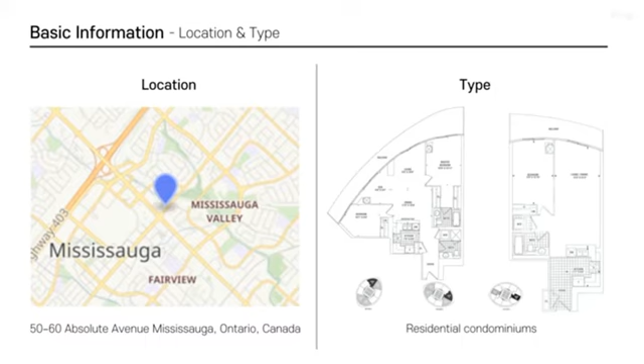Next, I will explain building organization. It consists of two buildings, Tower 1 and Tower 2. Tower 1 is 179.5 meters high and has 56 floors. The height of Tower 2 is 161.2 meters and it consists of 50 floors. And both towers have the same floor area of 2,800 square meters. In addition, each tower has 6 levels of underground parking.

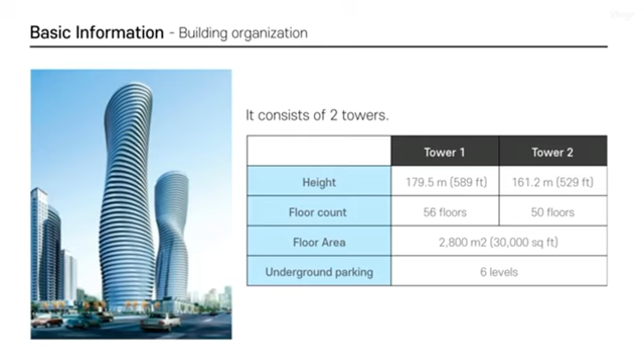Second, the purpose of the building's design. Let me explain the history of the building first. In 2004, an international design competition was held to select the architect for the third tower for Absolute World. Yansong Ma, founder of the MAD office, which is an architecture design firm in Beijing, was announced the winner. Sales were to start in May 2007 with construction beginning later that year and anticipated completion in 2009.

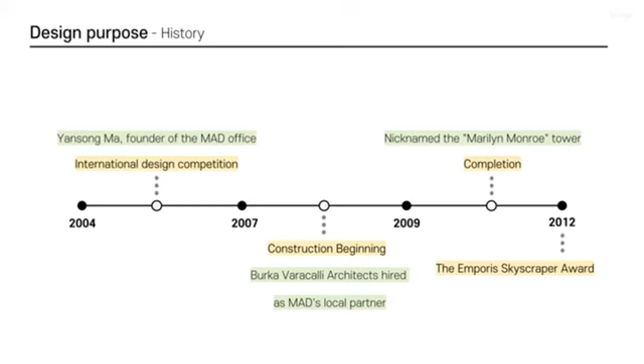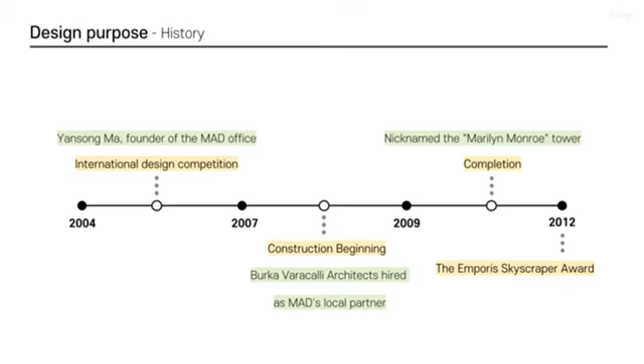Architects and engineers play an important role in building design. The main architectural design was conducted by MAD Studio, and Burka Varacalli Architects was a local partner of MAD. The meaning of local partner will be explained in the next slide. Sigmund Soudack and Associates Incorporated participated as a structural engineer.

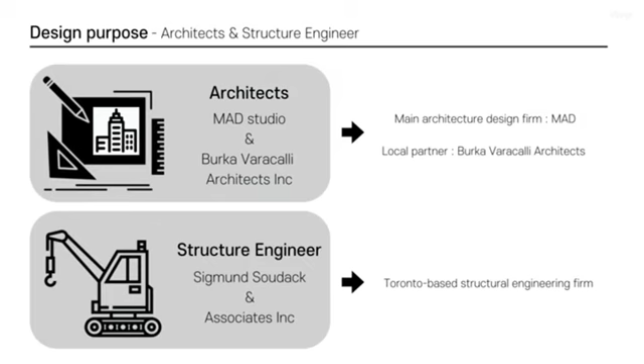Yansong Ma is a founder and a chief architect of MAD Studio. He wanted to create a new balance among society, the city, and the environment through new forms of architecture. So he designed naturalistic architectures to make harmony of environment and architecture. Absolute World Tower's naturalistic design reflects Yansong Ma's design spirit.

Burka Architects Incorporated joined the project in the capacity of Architect of Record. What does Architect of Record mean? For a short description, when an architecture firm is working on a project that is outside of their geographic location or range of expertise, firms choose an architect that is either local to the project site or skilled in that particular area of expertise. In this case, the primary architect works with the local architect to complete the project, and the local architect becomes the architect of record.

Burka proceeded with many high-rise building projects with Sigmund Soudack and Associates Incorporated. This is why Sigmund Soudack and Associates Incorporated was able to be adopted as an engineer for Absolute World design.

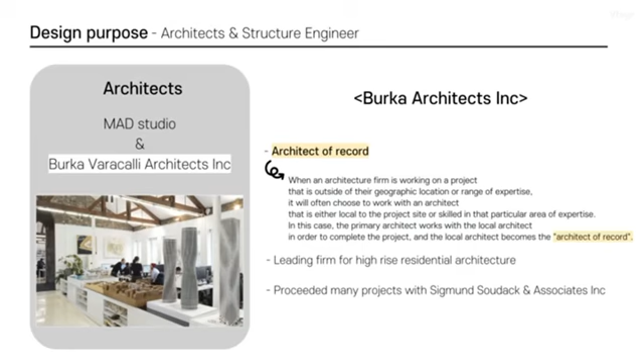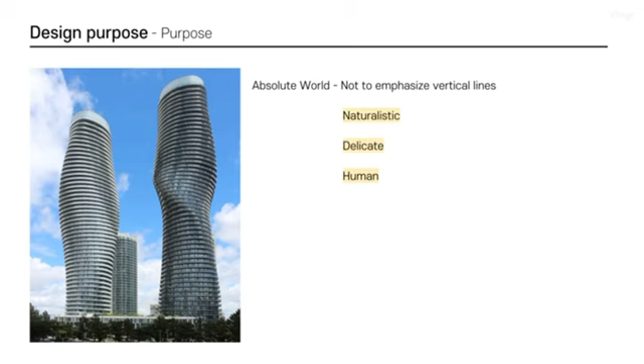So the designers of Absolute World didn't emphasize verticality. They focused on naturalism, delicacy, and human. As a residential landmark that strives for more than simple efficiency, the buildings provide residents an emotional connection to their neighbors and nature.

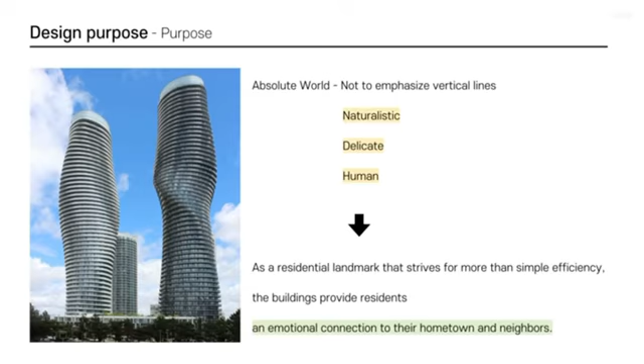Thirdly, let's move on to design characteristics of the building. Now, let's talk about how the design purpose is embodied in detail. The first prominent characteristic is that the Absolute World Towers use a curve, not a vertical line. Most high-rise buildings emphasize vertical lines just because they are skyscrapers. But the Absolute World Towers were different. The cross-section of each tower is made with curve, not with vertical line.

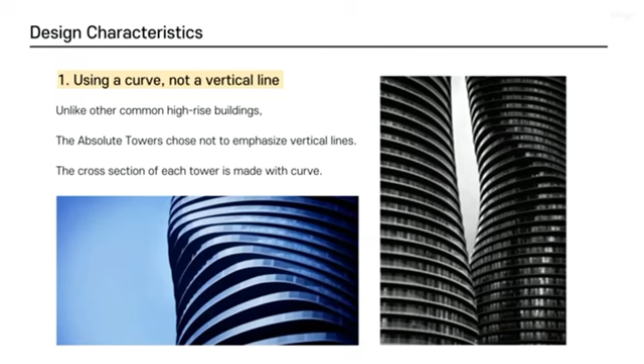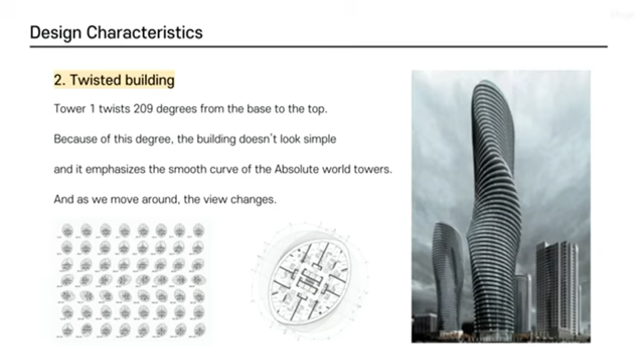The second feature is that it is a twisted building. Tower 1, which is composed of 56 floors, twists 209 degrees from the base to the top. The floor twists 1 to 8 degrees as the floor goes up. Because of this rotation, the building doesn't look simple and looks flexible and free. Also, it emphasized the smooth curve of the Absolute World Towers.

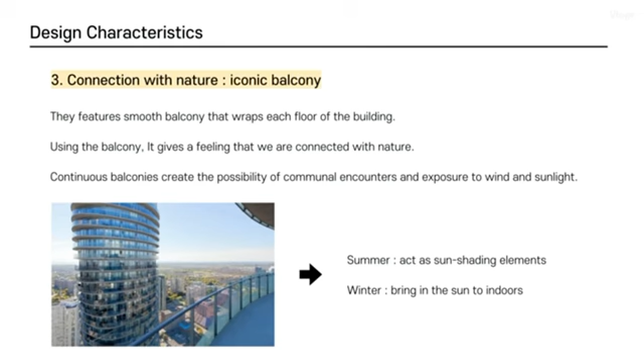The third characteristic is that it achieved the connection with nature by its iconic balcony. The smooth balcony wraps each floor of the building. The fact that balconies are on every floor and they encircle the whole floor edges is very iconic. These continuous balconies create the possibility of communal encounter and exposure to wind and sunlight. During the summer, balconies act as sun-shading elements, and during the winter, they bring in the sun to indoors.

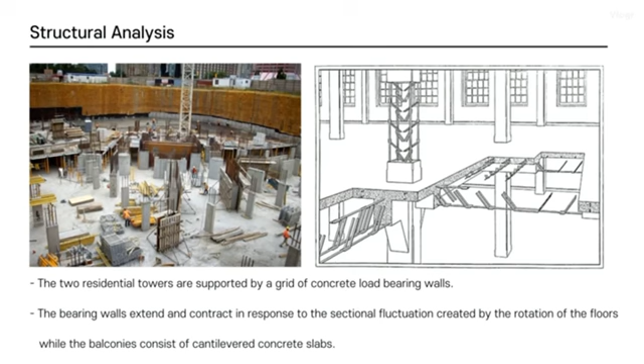Finally, the structural analysis of the building. The two residential towers are supported by a grid of concrete load-bearing walls. The bearing walls extend and contract in response to the sectional fluctuation created by the rotation of the floors, while the balconies consist of cantilevered concrete slabs. The balcony, which encircles the building, is a cantilever beam structure. Besides, it helps every resident have a nice exterior place to enjoy views of Mississauga.

During summer, the balconies naturally shade the interior from the sun, and during winter, the balconies help people to embrace sunlight and reduce heating costs.

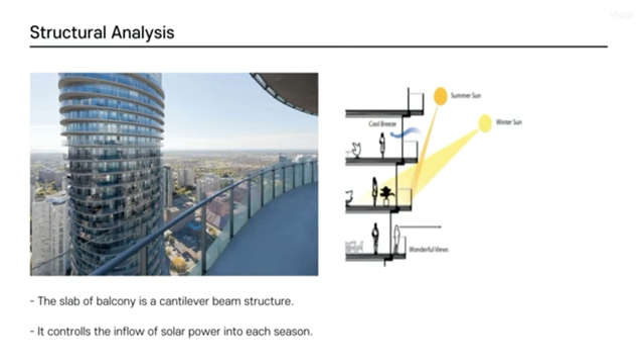Next week, we're going to investigate two major things. First, the inside facilities of the Absolute World Tower. Second, we will address the structural problems that designers had to deal with. Examples of problems include how to support the loading of rotating slabs, and secondly, the heat transfer method between balconies and interior facilities surrounding the entire building.